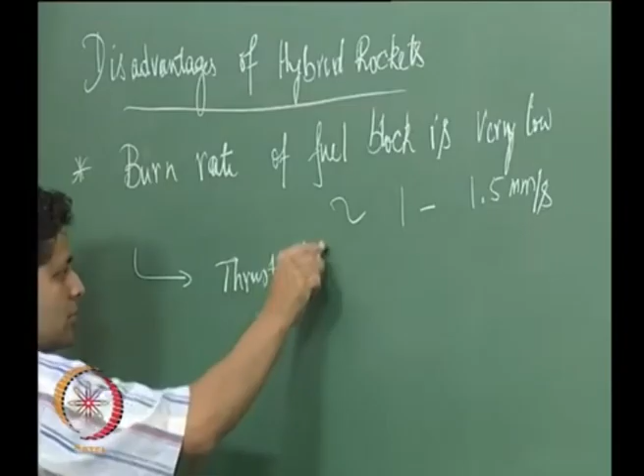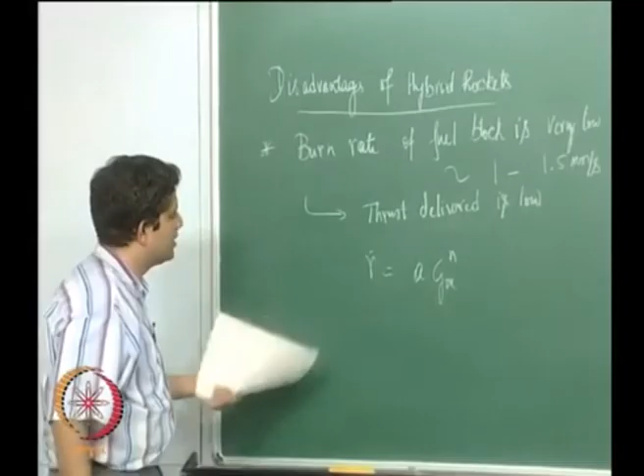The other disadvantage with hybrid rockets is, if you remember, I had said we can write the expression for the burn rate for a hybrid rocket as R dot equals A times GOX to the power n, where GOX is nothing but the mass flow rate, mass flux of the oxidizer in the port. So even if we keep this constant, it is possible to get the fuel mass flow rate.

This is nothing but the velocity at which it is getting consumed. Let us say we have a cylindrical port, then we need to multiply it by the area.

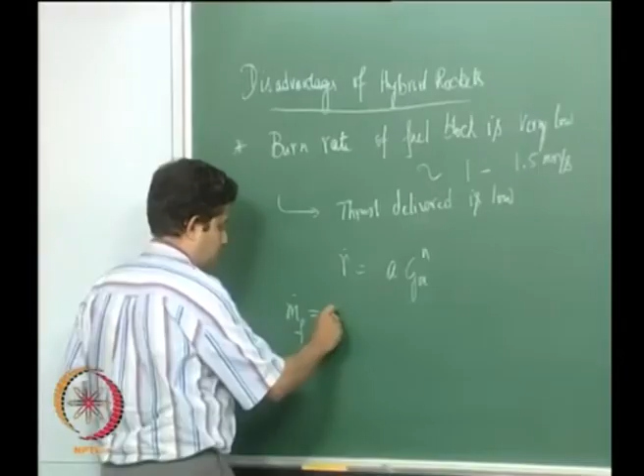Now this GOX is nothing but, as we had seen earlier, m dot OX by the area. So this is GOx, this is nothing but mass flux. So if we expand this portion...

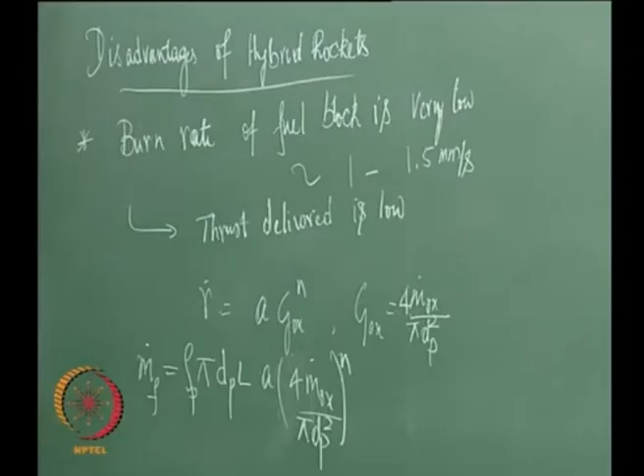This is the expression for fuel mass flow rate that we get. Now notice that there is a diameter in the numerator and a diameter in the denominator. Typically the values of n range between 0.7 to 0.8.

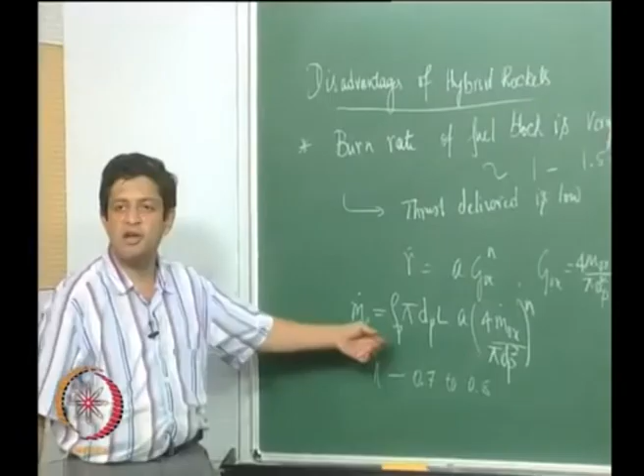Now what happens if we have that kind of n? You will have n to the power of, if we take 0.8, it will be 1.6 in the denominator and 1 in the numerator. So effectively what you will have is, if we consider something like this...

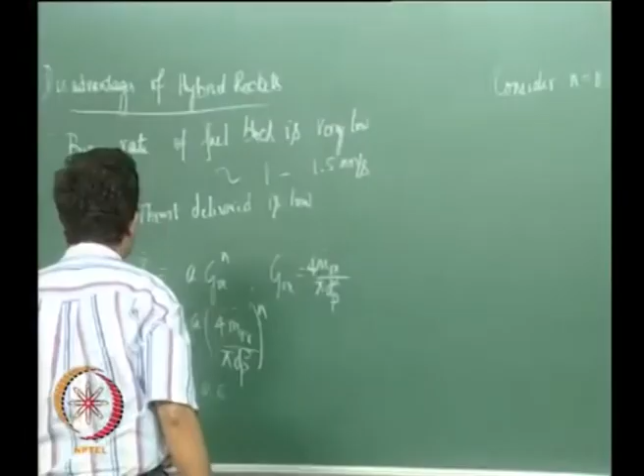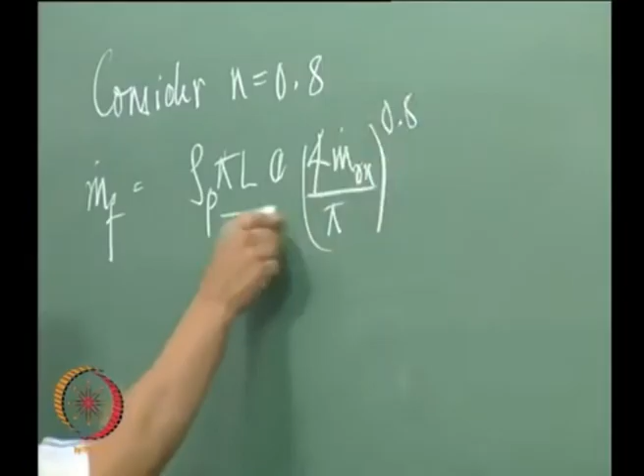Then what we are going to get is m dot f is equal to this expression. So what we have is the mass flow rate of fuel varies inversely as diameter to the power of 0.6.

So even if you hold the mass flow rate of oxidizer constant, the fuel mass flow rate keeps on changing. So m dot f will be a function of diameter, and depending on the value of n you will have different powers here. So what we can see is the mass flow rate of the fuel is not constant during operation, because the diameter keeps changing and the mass flow rate of fuel will also keep changing.

So what does this do? If m dot f varies, even if you hold m dot ox constant, it changes your O by F. So essentially O by F is not constant.

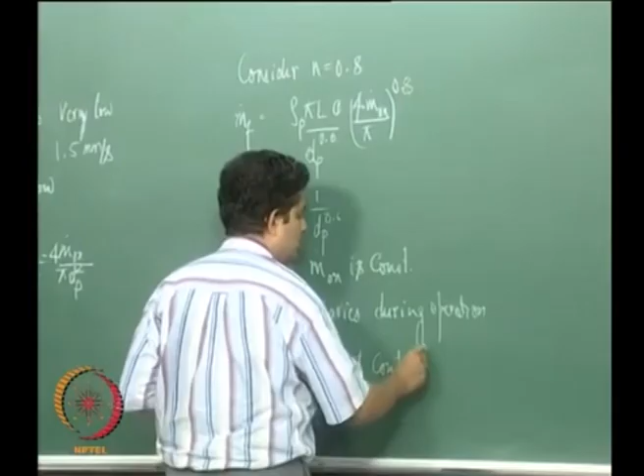during operation. Now this has more serious consequences in terms of what happens to the specific impulse as a function of O by F. I will try to plot here for a couple of them.

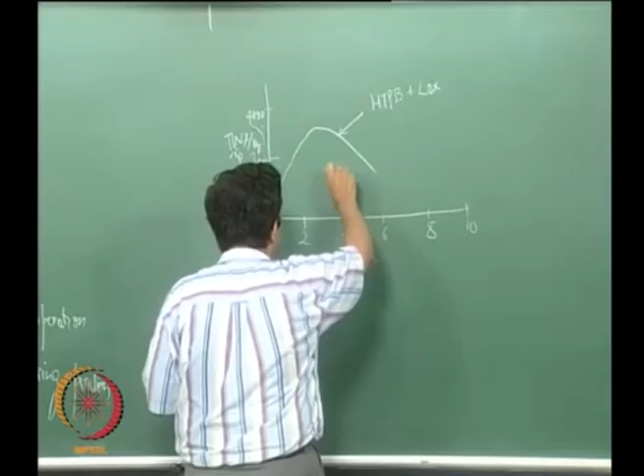Now what we see here is that if the O by F varies, then the ISP will also vary. So if you are wanting to design a system wherein the thrust is maintained constant, even nominally maintaining constant is very difficult with a hybrid rocket, simply because the O by F changes during operation and then ISP will change, so therefore thrust will change. In addition to this, the mass flow rate is also changing - the mass flow rate of fuel, even if you hold the oxidizer mass flow rate constant, it is changing, so therefore holding thrust constant during operation is very, very difficult.

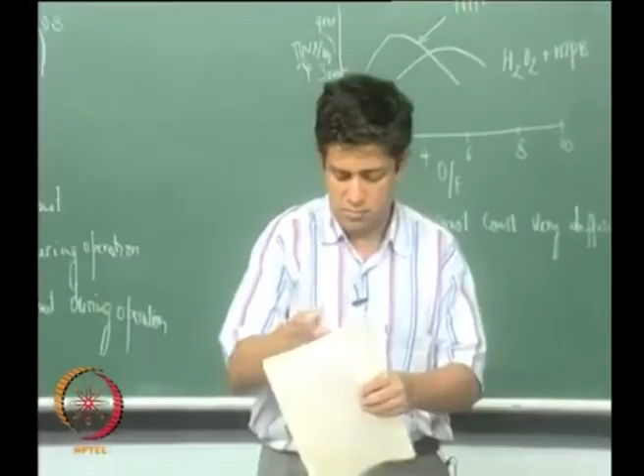Now the other trouble with hybrids - people have looked at this - we are saying that the burn rates are very low. When we discuss solid rockets, we discuss this, that only the burn rate and burning surface area are under the designer's control once you choose a particular propellant type. So you can increase the burning surface area and therefore make up for the lower burn rate, as we talked about. So people have also considered that.

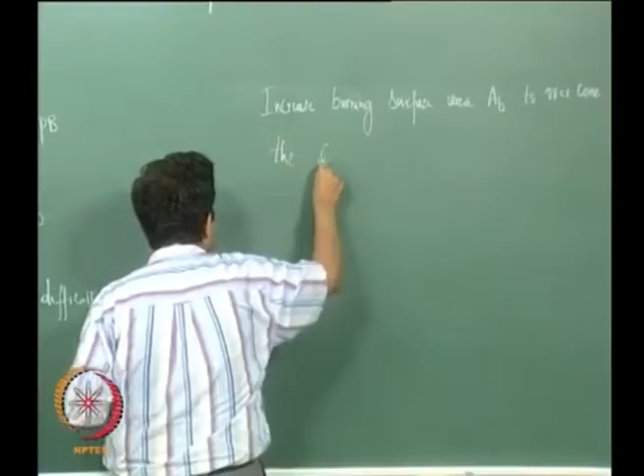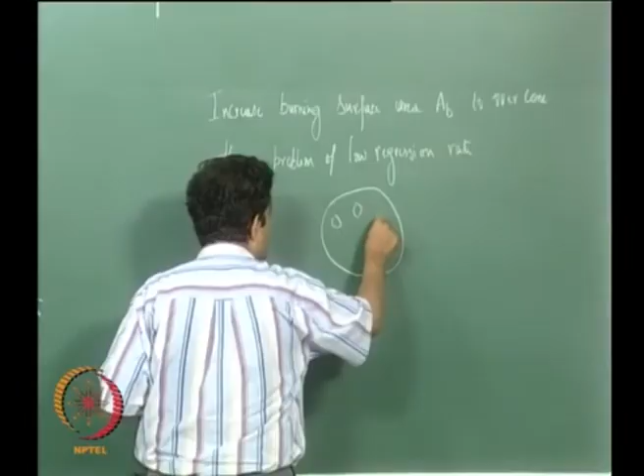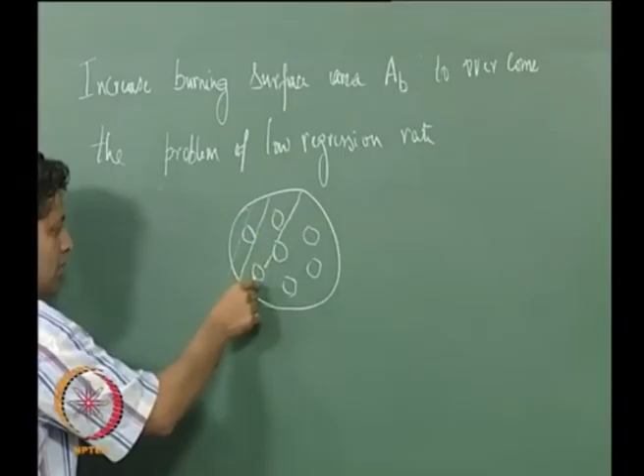What happens is they have come up with this kind of a design: instead of having just one port, let us say I have multiple ports. Instead of just having one port, all these are ports - you are taking a sectional view. So there are multiple ports here.

But if we do this, yes, we might be able to increase the thrust, but what about volumetric loading of the propellant? That will go down. We had said one of the advantages of hybrids over liquids is that the volumetric loading of the propellant is much higher compared to liquids, but that is no longer possible if we go in for multiple ports. Also, as they burn further towards the end, this could lead to very serious problems regarding the integrity of the grain, and other issues might come in. So multiple port design, although it looks feasible on the outside, has various problems. Therefore, this is something that is also not looked at.

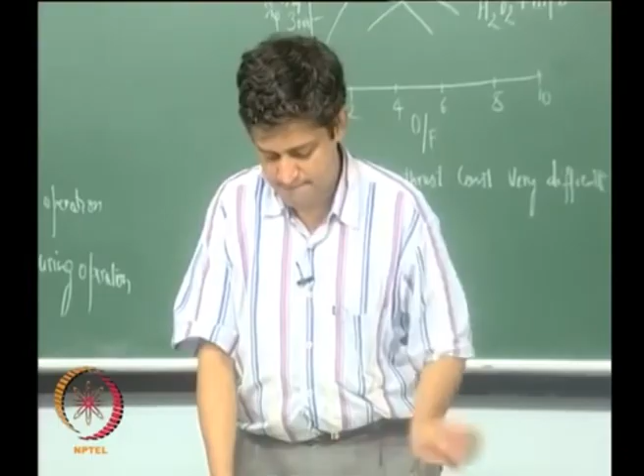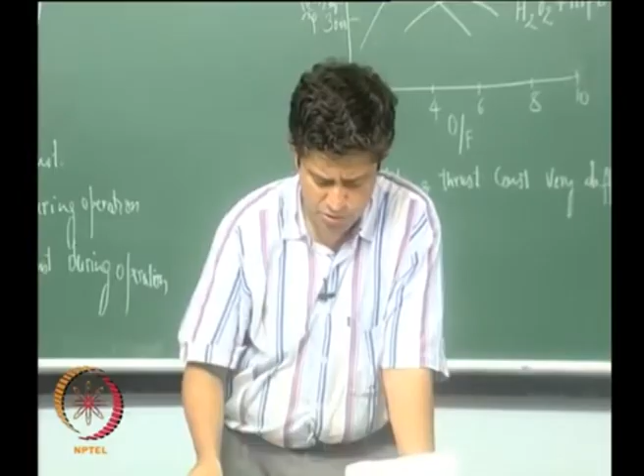Now we have kind of listed out some of the major drawbacks. In addition to this, if you look at hybrid rockets, the other outstanding problem is what happens to the burn rate from the head end to the nozzle end. So if we take a hybrid rocket motor, let us consider only the fuel portion.

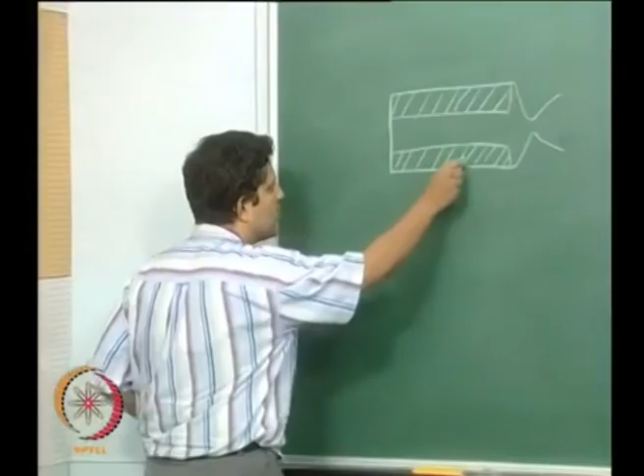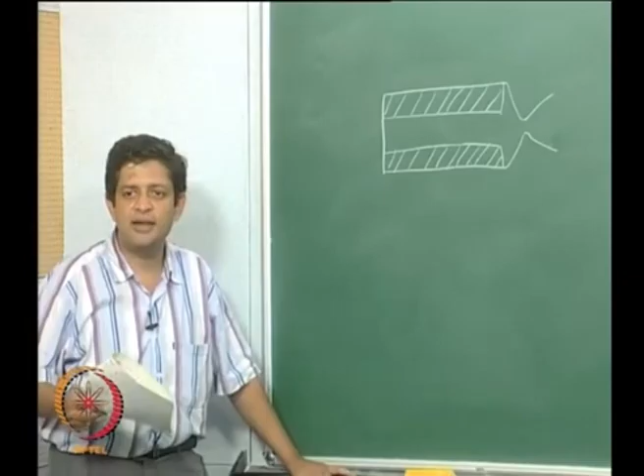Now if you look at this - remember when we discussed solid rockets, we talked about something called erosive burning, and we said that the mass addition coming into the port is increasing from the head end to the nozzle end, and therefore the boundary layer thickness continuously decreases, and as a consequence there is a higher burn rate observed at the nozzle end. This is a system that works on this principle. So therefore what you will normally observe is that the burning is not uniform from the head end to the nozzle end.

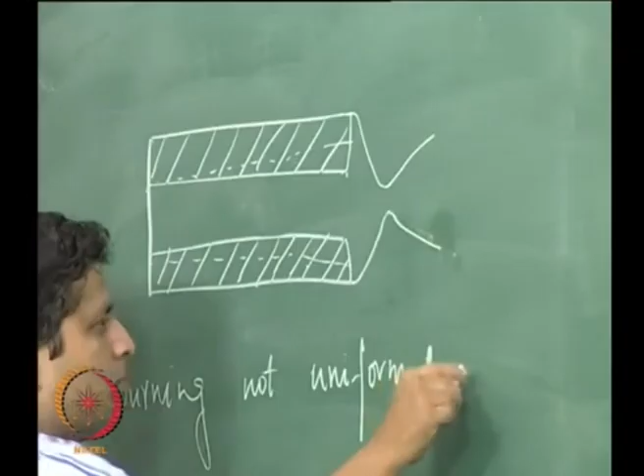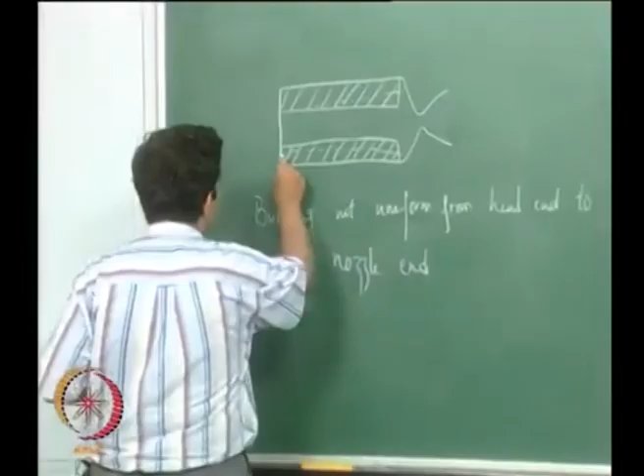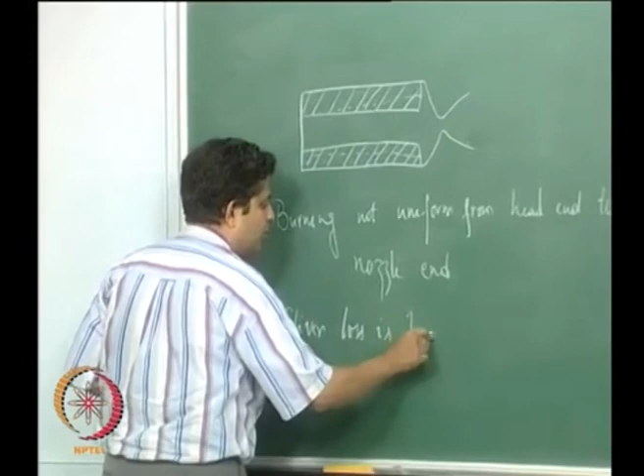This also leads to the other problem of sliver losses. Remember, sliver is unburnt propellant. So if you continue burning this motor, at some point there will be some propellant left unburnt at the head end, whereas the propellant would have completely burnt near the nozzle end, and there is a point at which you will have to stop, because this would then affect the motor casing itself. So as a consequence of this, the sliver loss is going to be high.

Now this as such looks like a big list of problems that we have discussed, which makes it very difficult for hybrid rockets to overcome. In addition to this, there is something known as the problem of scaling.

What do we mean by this? Simply put, if you do a lab scale test and compare it with an actual motor - remember when we talked about solid rockets, we can get a very good feel of how the burn rate varies in a strand burner and then in a ballistic evaluation motor, and it is very close to what you will get with a large motor. There is going to be some difference, but it is not a very large difference.

Now similarly, what happens in a hybrid rocket is that if you burn a very small motor on a lab scale - because those are experiments you can do very frequently and they are less expensive - what is its bearing on a large motor? Unfortunately in hybrids the scaling is not very good from what you get with a small motor to what you get with a large motor.

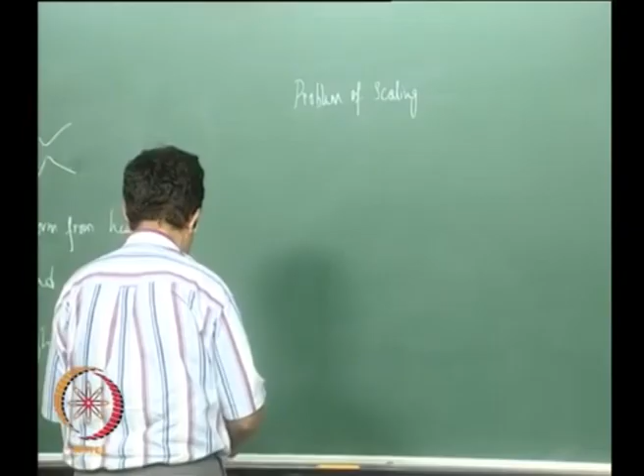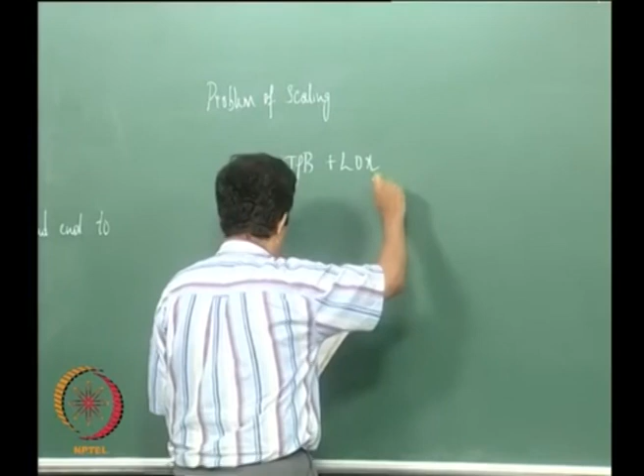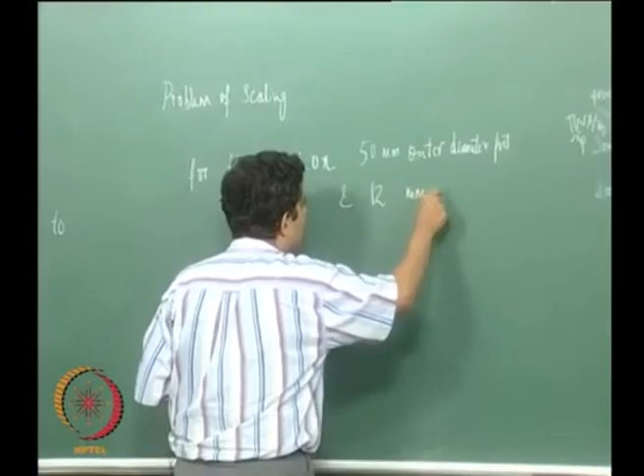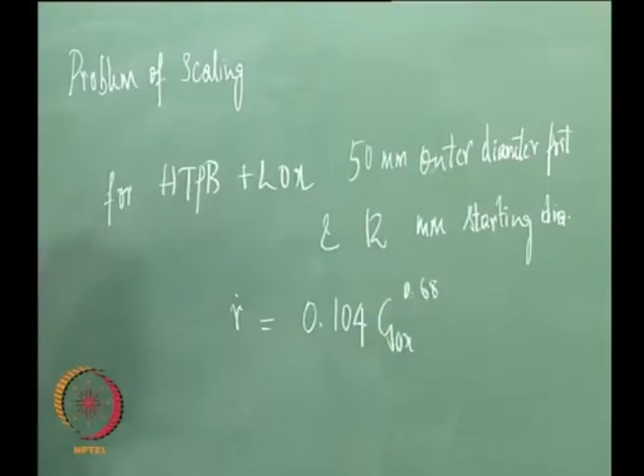So people have done this experiment at lab scale, for HTPB plus LOX. If you do something like a 50 mm outer diameter port and 12 mm starting diameter - this is the same propellant, oxidizer, same fuel - the burn rate law that people get is something like this. Now if they do the same propellant on a larger scale motor.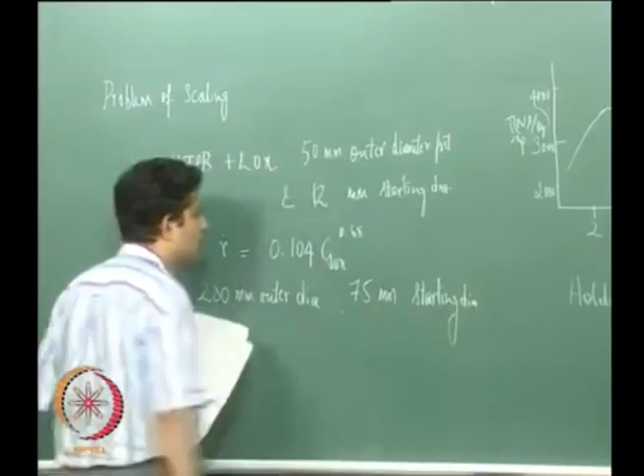That is something like a 75 mm starting diameter and 200 mm outer diameter, the burn rate law that they get is very different.

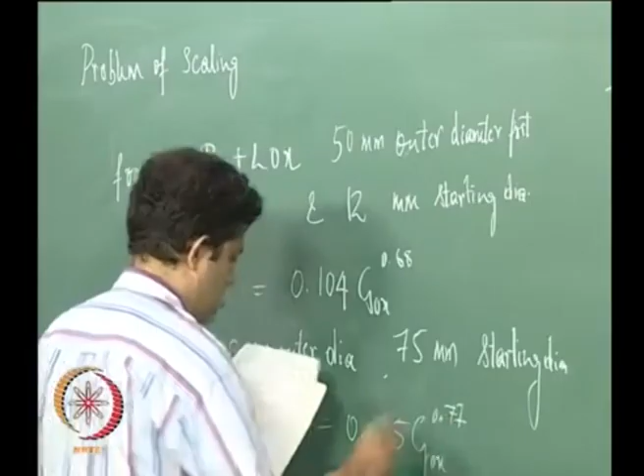Now this makes it even more difficult to have a realistic motor, because if you want to design a large scale motor, it looks like you have to do all the testing at the large scale itself. There is no way you can do small scale testing, get some measurements done, and then use them for the large scale, because the burn rate laws themselves are not valid for, are not the same for small scale and large scale. Even the n is very different, right.

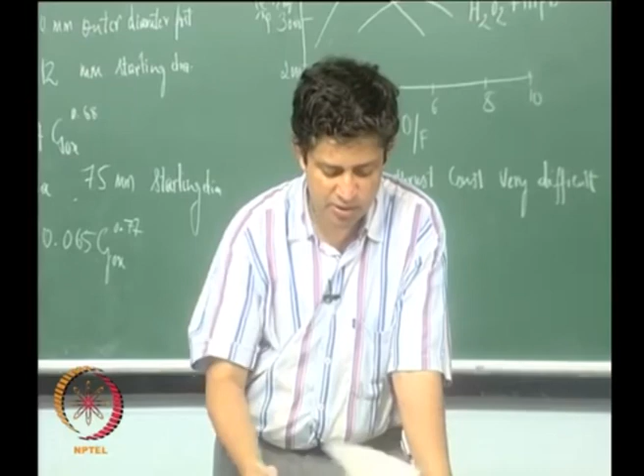So because of these problems, hybrids have not been able to reach a technology level that can be used in a launch vehicle. Now some of these problems have been there for a very long time, and people have been looking at trying to resolve this. There are various things that people have done to overcome some of this. We will discuss that briefly.

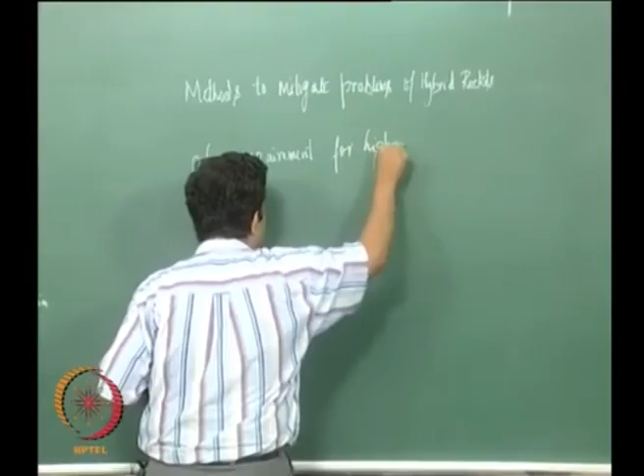Now the first problem that we discussed was with regards to burn rate of the propellant. One of the thoughts that people have come up with is, if you look at the O by F requirement for highest ISP, if we can shift it to a higher value of O by F, that is, you choose a fuel and oxidizer combination such that it gives the best performance at, let us say, 6. There is such a propellant combination possible.

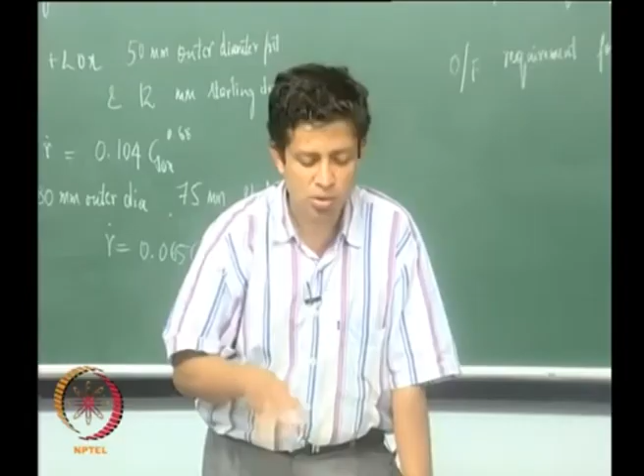If you look at hydrogen peroxide and HTPB, the highest ISP is achieved somewhere around 6. What it would mean is, you need to push in more mass flow rate of oxidizer, which also would mean that the fuel mass flow rate will be higher, because the two are related. So that is one of the suggestions to overcome this problem of low burn rate.

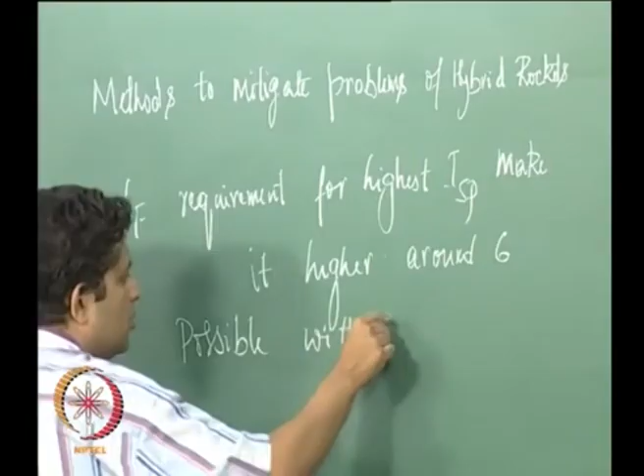This is also not such a great idea, because if you look at the specific impulse overall, even with H2O2 systems, it will be somewhere around 300 seconds, or 3000 Newton second per kg, which is not a very large value that will force the industry to take a very positive view of this. So, in a sense, this idea does not sell itself so much.

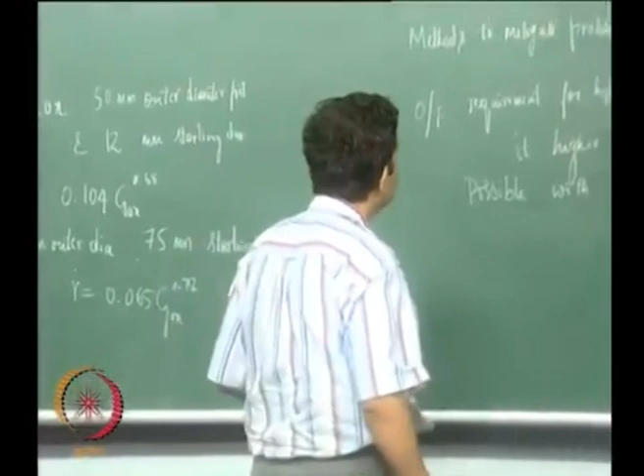Now, the second thing was to use ultrafine aluminum powder, or nano aluminum. People have done these experiments. They have found that if you use nano aluminum, you can increase the burn rates to something like 4 times what you get, that is, the fuel burn rates can be of the order of 4 millimeters per second.

Which is probably very good, and you can make a very good or a very high thrust motor with this, simply because if you look at, we are only talking of fuel flow rates. In addition to this, if you take the O by F into consideration, the oxidizer flow rate will also be there. So, the overall mass flow rate will be much higher.

But the flip side of this is, if you look at nano aluminum, the cost of it is very high, something like 50,000 rupees a kg. So, this is why there are also issues when you make a motor of a large scale. How do you cure it?

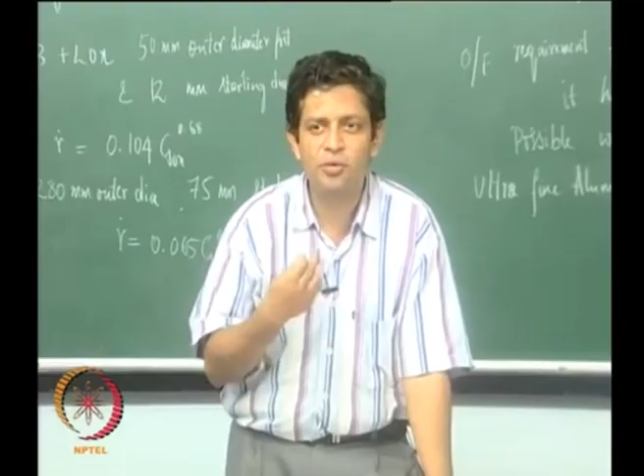Because the number of particles becomes much larger. If you are using micron and suddenly you go to a nano scale, you are reducing the particle size by 1000. As a consequence, the number of particles will increase, it will go as cube of this 1000. So sometimes it is very difficult to get a good cured propellant with good mechanical properties if you go in for something like nano aluminum.

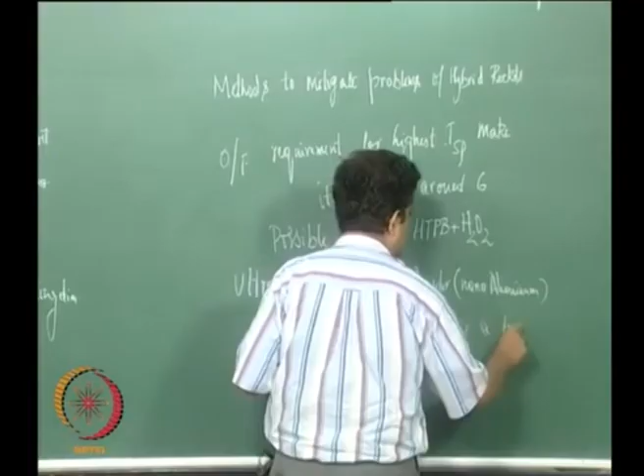Then what people have also looked at is something called a mixed oxidizer concept. Instead of having just HTPB alone, if we add ammonium perchlorate to it, and if you add too much of ammonium perchlorate, then it will become like a solid propellant. There is a percentage of ammonium perchlorate that you can add such that it does not burn on its own, such that it should not start burning on its own like a solid propellant. So you can add a little bit of ammonium perchlorate so as to increase the burn rates. So people have done this also.

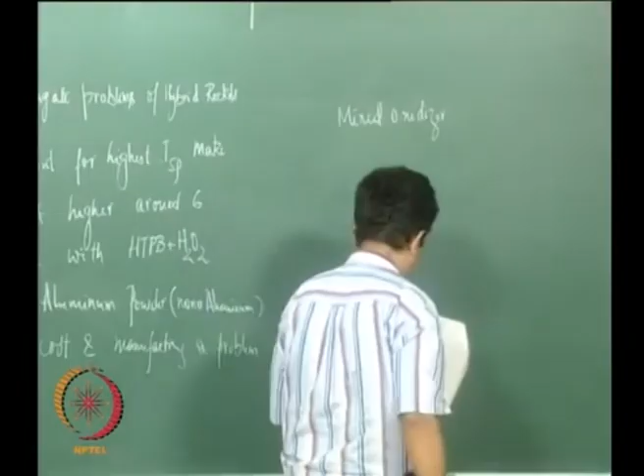This is known to give burn rates of the order of 4 millimeters per second, which is very good to make a solid hybrid rocket engine. But the flip side is you cannot use beyond some percentage. It has to be something less than 25%.

If you use more than that, one of the advantages of hybrids, that if you switch off the oxidizer supply it will stop burning, won't happen. So there is somewhere around a critical content of AP that you can use.

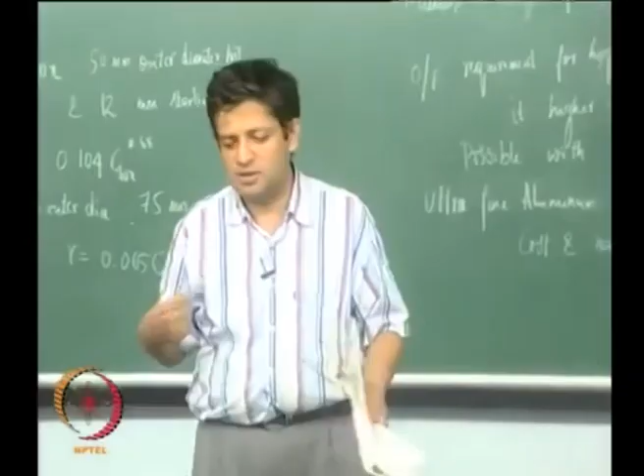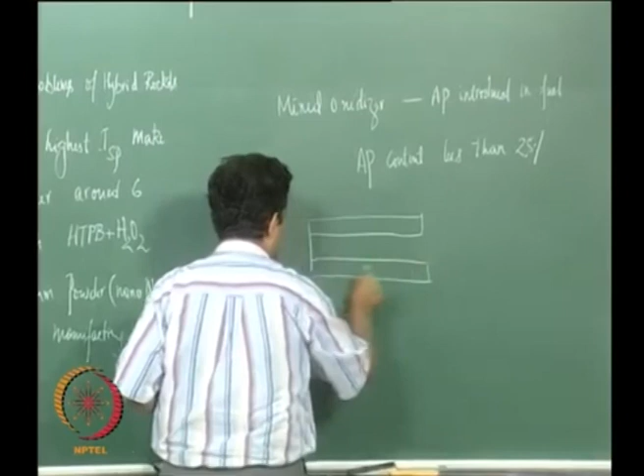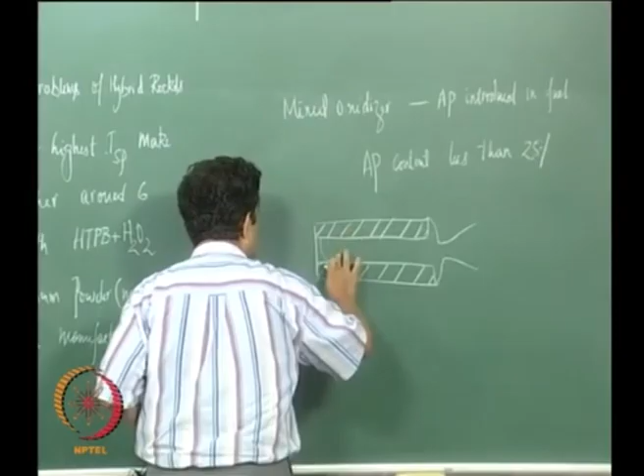Then people have also come up with something known as swirling. If you inject the oxidizer in an axial fashion, let's say this is the fuel block. Now, instead of injecting the oxidizer axially, if you are able to give it a swirl...

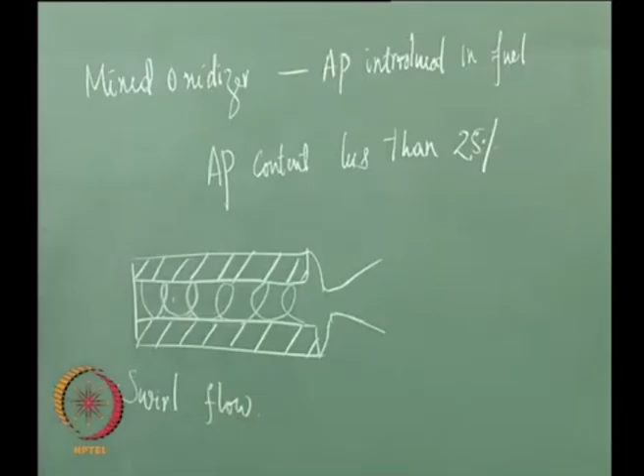There are two advantages that you will get. One is, if you look at the actual surface area that the oxidizer gets to see, that will be larger because it is taking a very helical path. So the actual surface area the oxidizer sees is much more than the apparent surface area.

In addition, if you look at swirl flow, because of the swirling nature of the flow, the fluid tries to stick to the walls. So the actual velocity profile close to the wall will be very high, leading to very high burn rates rather than injecting it axially, because for an axial flow the velocity profile will be something like this.

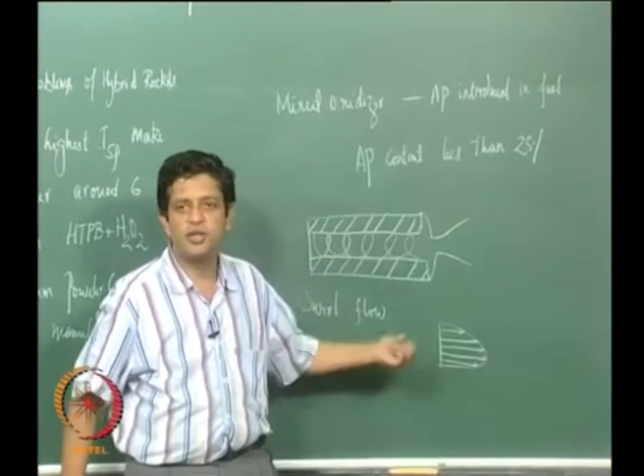So a larger fraction of the flow is along the center line, whereas if you swirl it, most of the flow will be close to the walls, and therefore the burn rates are going to be higher with a swirl flow, and this has been found true. So this can lead to...

High burn rates. But on the flip side, you are injecting the oxidizer in a swirl flow. What happens to the exhaust? Exhaust will also have a swirl component, which is fine if it is only one motor. But if you have two motors, you have to look at having the swirls in opposite directions, and you are not too sure whether they will cancel each other out or introduce a moment on the entire vehicle, taking it into a spin, which is something you might not want. So therefore this is also not such a feasible solution.

The other two solutions that people have come up with: one is wax, that is used to make candles, as a fuel, simply because wax has a very low melting point. Because of this low melting point, when you have a transverse flow, the wax that is in a molten state will form droplets that get entrained into the flow. So the mass burn rate of the fuel will be much higher, and what they found in experiments is that if you have a wax and oxygen system, you can get burn rates of the order of 5 millimeters per second.

But the flip side of this is, if you look at a candle or a crayon, it is basically wax, and it is very, very brittle. The structural or mechanical properties of wax are very poor, and therefore it cannot be used as such. You have to tailor the mechanical properties with certain additives to improve them. So currently its mechanical properties are a problem.

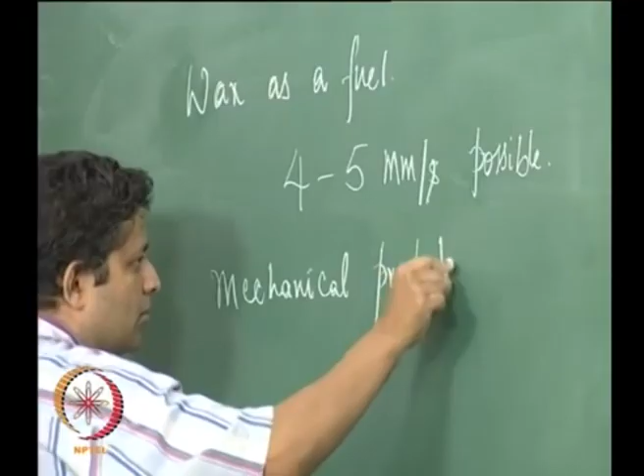There is also another solution that people have come up with. Just like you have ammonium perchlorate that can burn on its own, there are oxidizers that can burn on their own at certain conditions. Is it possible to have fuels that can also burn on their own? One such fuel is glycol azide polymer, or GAP.

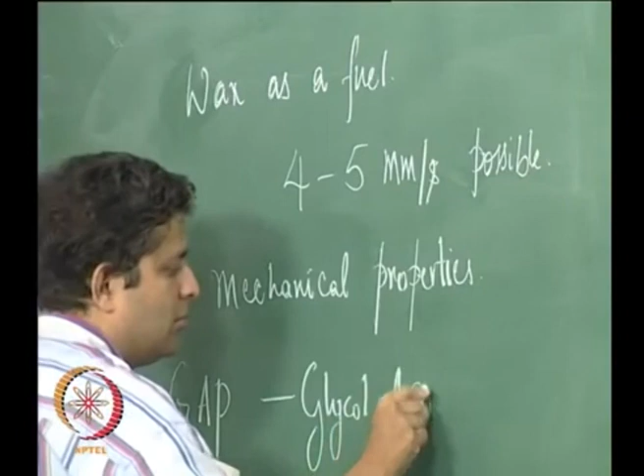So the burn rates you can get with this are very, very high. It also has the problem that even when you switch off the oxidizer flow rate, it will not quench because this can burn on its own. So what people have come up with is, you add another polymer of similar density such that the overall thing does not burn on its own, but when you have oxidizer flow and ignite it, it will burn.

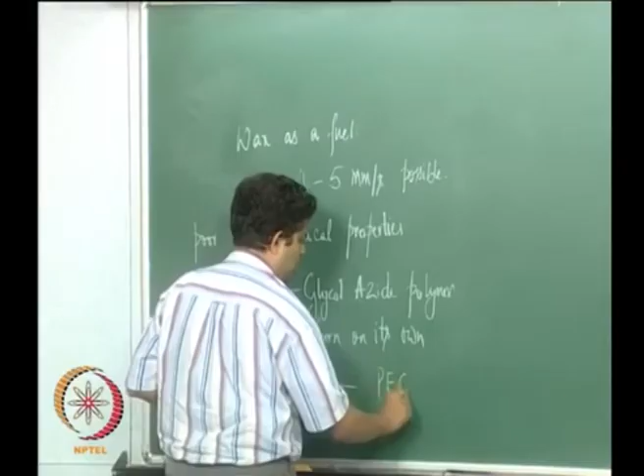But the polymer used for that is PEG, or polyethylene glycol, which has very similar densities. Now the trouble with this system is, firstly, burn rates are lower because you have added an inert polymer.

The other thing is the costs associated with GAP. Remember, when we spoke about hybrids, we said the cost is very low because you can virtually use any kind of polymer, you need not have a very special polymer, and therefore the cost can be much lower. But that takes away the advantage, because you are now going to use something very expensive, of the order of 50,000 rupees, or if I am not mistaken $50,000, per kg, which is very expensive. So even if you build a practical system, people will say, why use this when we have established systems?

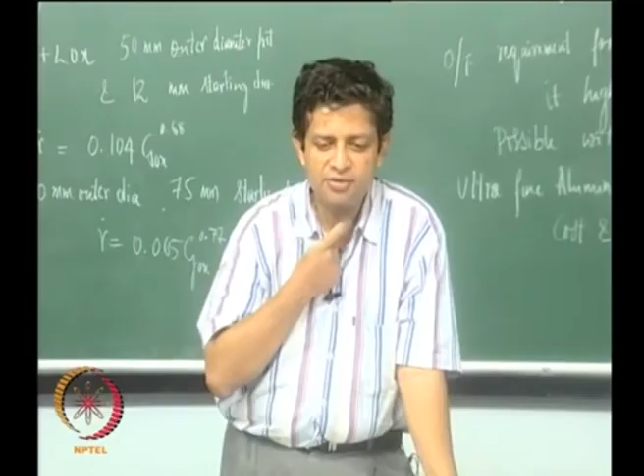If you look at the ISP variation with oxidizer or the O by F ratio, what you can get with a hybrid system is something that you can get with kerosene LOX systems. It is not very different. Most countries have kerosene LOX engines; India is probably the only one that does not. So most countries look at hybrids as something you need to do in addition to what you already have, but you will still end up getting performance similar to a kerosene LOX engine. Why take all the trouble for something that is not any better? So most countries have not really bothered with work on hybrids.

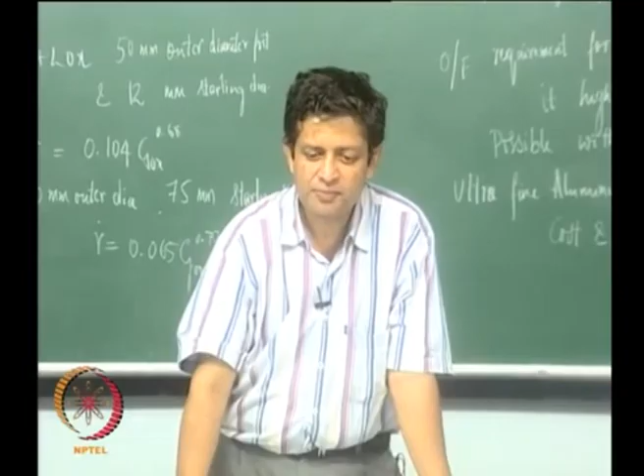But there is a silver lining, in that there is something called aluminum hydride. Aluminum hydride is considered to have a higher storage of hydrogen per unit volume than storing hydrogen on its own. The density of hydrogen you get is 70 kg per meter cube, but with aluminum hydride, the volumetric loading of hydrogen you can get is much better than with liquid hydrogen.

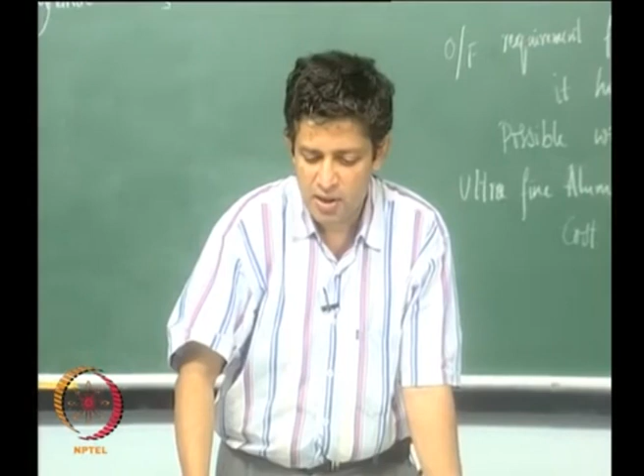But the technology of making this is very, what should I say, a very explosive compound. It is very difficult to stabilize. It is very reactive with air because of the hydrogen, and if you have oxygen it will tend to react and give rise to water. So it is a very unstable compound and very difficult to control. Only the Russians till now have the technology of making this, but if it were available, you could get over LOX kerosene performance.

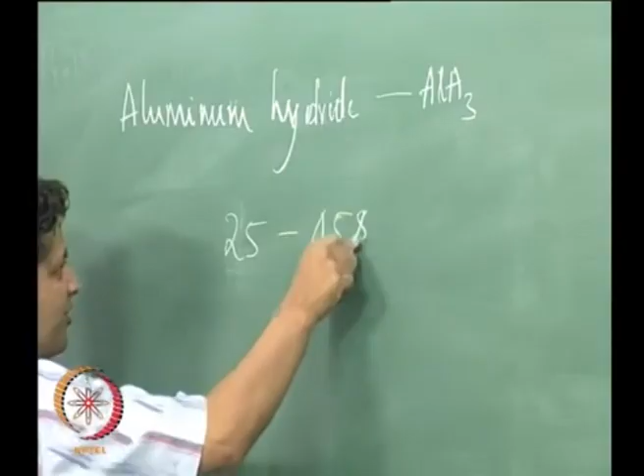The ISPs you get with aluminum hydride being used is something like 25 to 45 seconds higher than LOX kerosene. That is, if you use this aluminum hydride in a hybrid and make an engine out of it, the ISPs you get are going to be higher than what you will get with LOX kerosene. So in some sense this is driving the research forward. If you can get a system with much higher ISP than a LOX kerosene engine, why not use it?

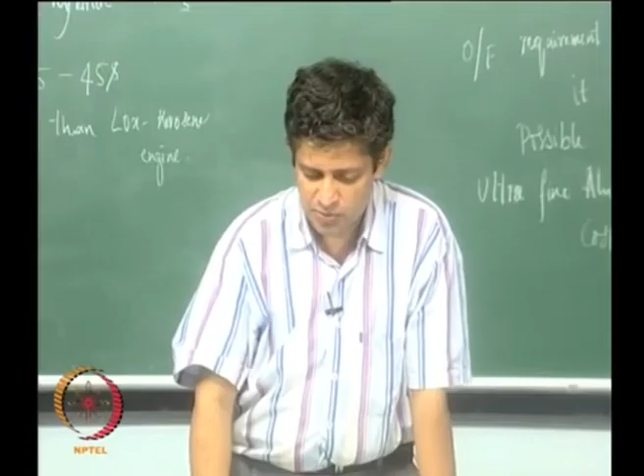There was one other drawback of hybrids that I missed out on, something to do with combustion efficiency. If you remember, when we discussed liquid rockets and solid rockets, we expected a value of greater than 98%, which indicates how much of the stated ISP you will be able to achieve. If this is very poor, then the ISPs you get will be much lower than theoretical calculations predict.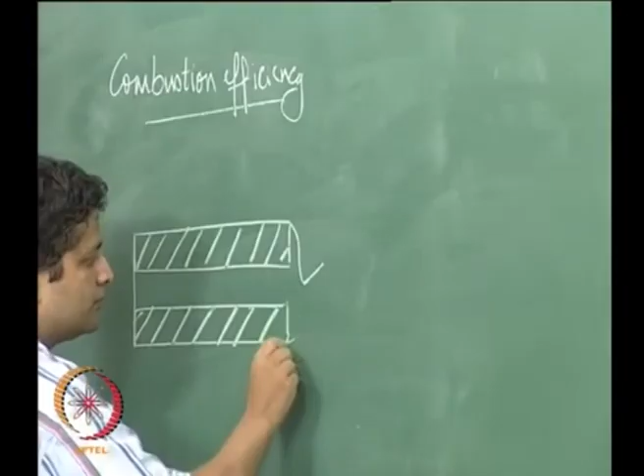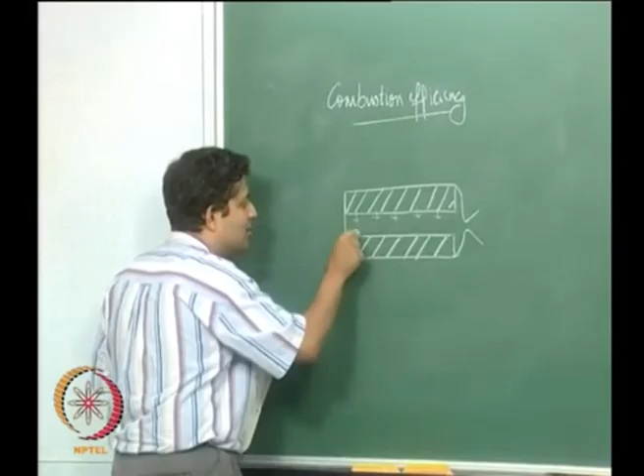Now in hybrid rockets, the oxidizer is injected here, and one needs to be careful, because if the oxidizer does not mix with the fuel coming in, and it needs to mix with oxidizer going along this direction, looking at this geometry, the oxidizer in the center finds it very difficult to mix with the fuel. So some of it might just escape without mixing with the fuel, and as a consequence, the combustion efficiencies are quite low.

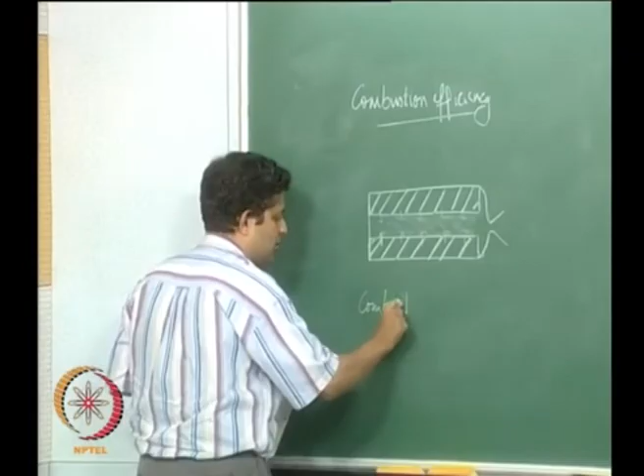So whatever ISPs you get from theoretical calculations, only a fraction of it you can actually achieve. There are efforts to ensure that this combustion efficiency is also higher. So if you look at hybrid rockets as a whole, there seem to be a whole lot of problems associated with them, which is why they have not been used till now. And in a different sense, this is also an opportunity for doing research in that area, simply because it has very good features.

If you can somehow tailor the fuel or use some other means to overcome these problems, then you can have a system with very good ISP that is also very safe, which would be required for missions where men are on board some of these rockets. Safety becomes a very critical issue then. So for such missions it is probably a viable option, and therefore there is a lot of interest in this area. Thank you.